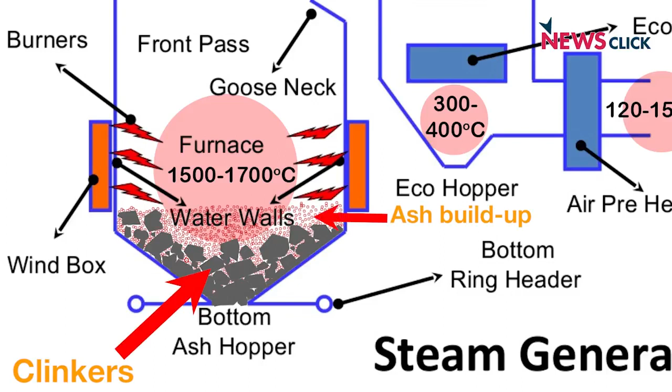The clinkers choked the bottom ash hopper, leading to a huge buildup of ash inside the boiler. As a result, the pressure inside the furnace started increasing. So, the NTPC officials tried to bring down the load. At the same time, they attempted to remove the clinkers manually by inserting steel rods through the manhole doors and the bottom ash hopper, a process known as double poke.

It is crucial to note here that, at this point, it appears the NTPC officials bypassed the boiler protection by disabling the master fuel relay trip, which cuts off fuel supply when the pressure gets very high, because they wanted the boiler to keep running.

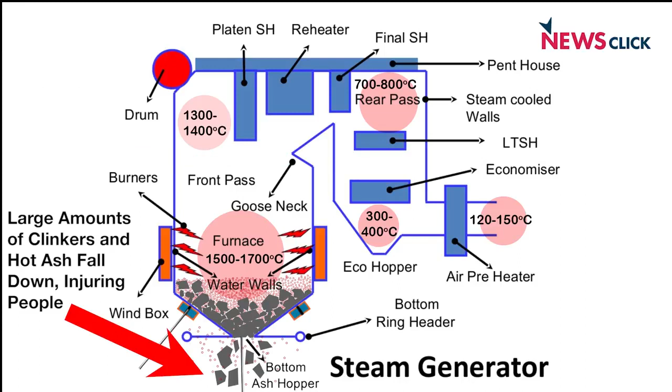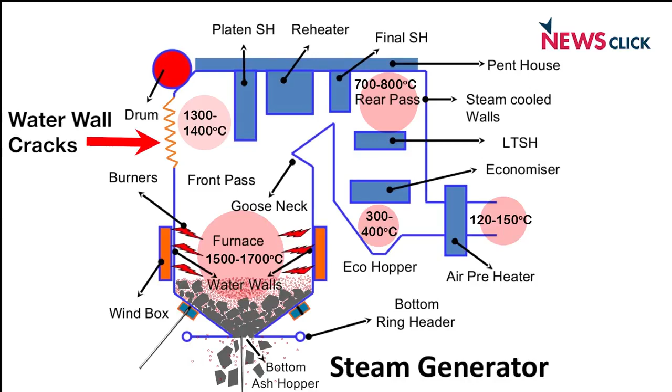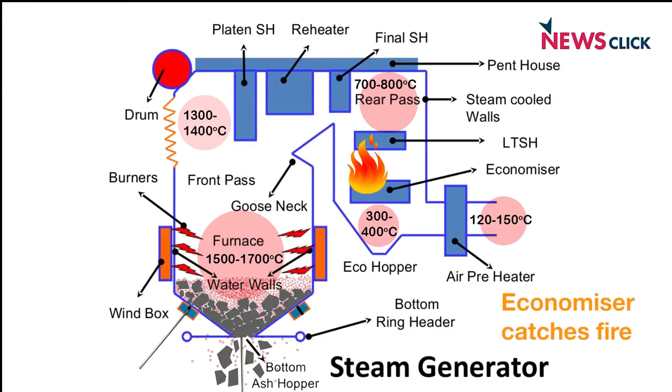As a result of the double poke, a huge mass of clinkers fell down, creating unstable conditions inside the boiler because of large pressure fluctuations. This led to the water walls being cracked, and unburnt coal particles got carried over to the rear pass of the furnace. In the rear pass, the unburnt coal particles caught fire, leading to an explosion in the economizer.

Hot flue gas, ash, and steam came out of the economizer area, causing extensive burns to the 300-odd people who were working in the vicinity of the boiler.

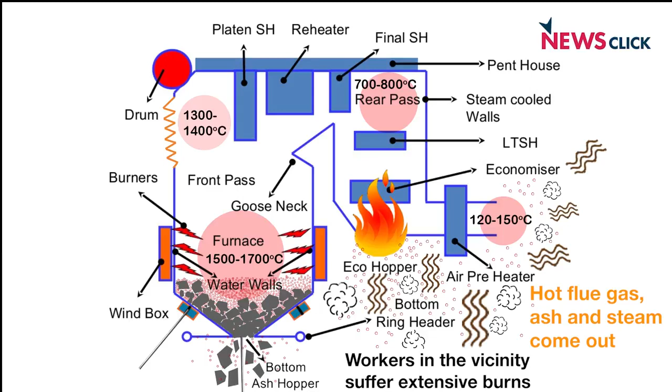Why was the boiler protection bypassed? Why were there so many workers around the furnace? Is it because work on the unit was still pending, as sources say? Why was the unit put under commercial operations when it was not yet ready? Only the NTPC has the answers.